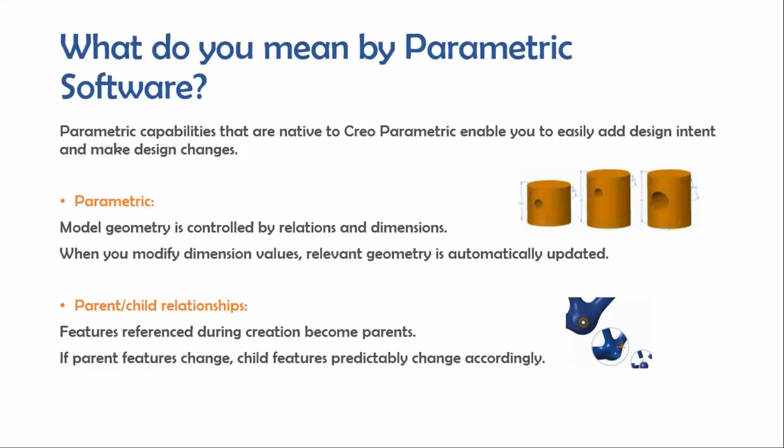With the help of an example using Creo Parametric software, let's see how this parametric tool works. I'm currently in the part modeling environment, where I am going to create a simple sketch. Let me draw the rectangle and make some changes to the dimensions. So here you can see the sketch has dimensions as well as relations.

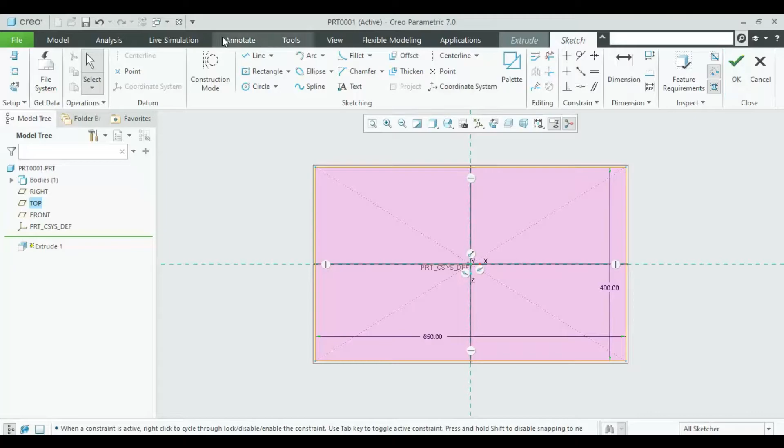Let's change the dimension. Alright, as you can see I have modified the dimension. So let's also create a hole in it. Now you can see there are two dimensions, in the x and y directions, and one dimension which is the hole dimension. So let's change the dimension referenced from the top face, and let's change the diameter of the hole. All right.

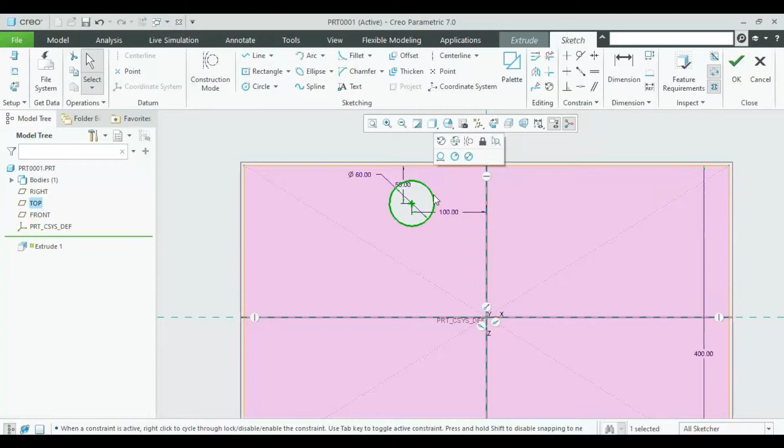Alright, in the next case, let's see if I make a circle along the diagonal. Here you can clearly see that the parametric technology inside the software is taking the reference of the relation and the reference dimensions from the top edge. So there are only two dimensions: one is the diameter, the second is the dimension from the top edge, and it takes the reference of the diagonal, and you can see the coincident relation here.

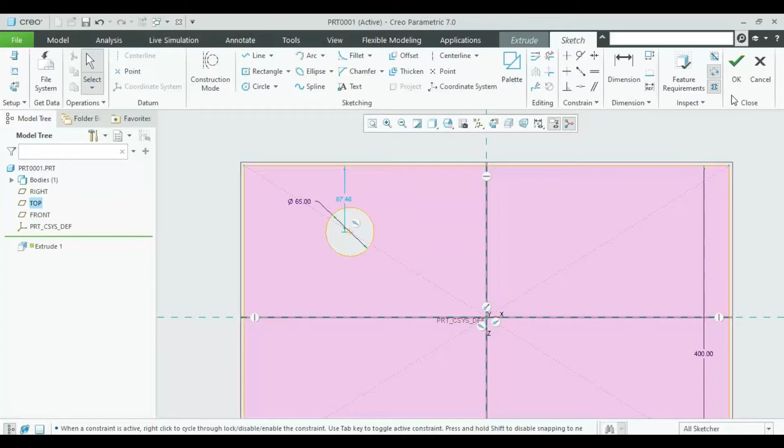All right, let's close this, give some thickness value and click on OK. Here is the first feature, the extrude which I have created. So what will happen if I change the dimension from 400 to, suppose, 300?

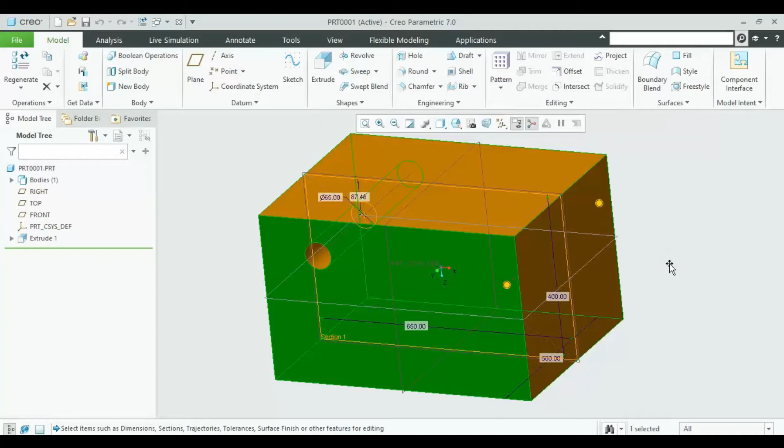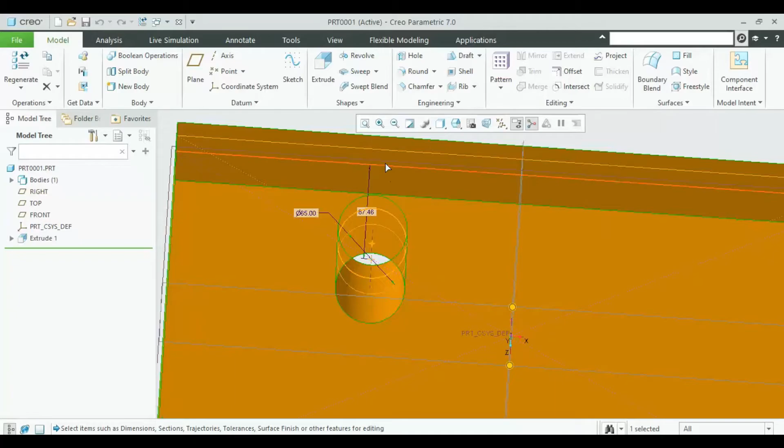You can clearly see that the hole is maintained at the same distance, 87.46 from the top surface edge, and the diameter of the hole also remains the same. Now let's change the diameter of the hole and see what happens to the other dimensions. Here you can see the dimension from the top remains the same and the diameter of the hole changes. Makes sense.

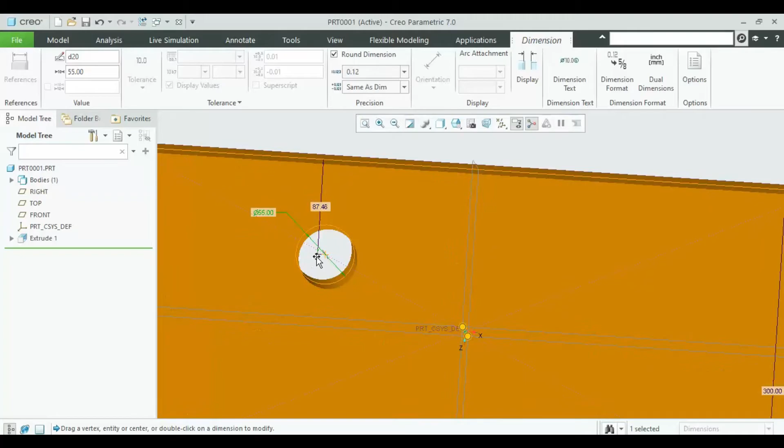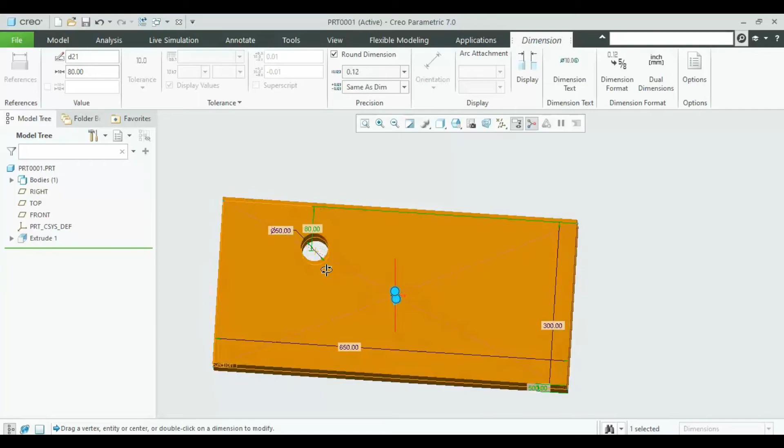Okay, now let's change the height from the top edge. As you can see, since the hole has to maintain the coincident relationship as well as the distance from the top, it is moving along the diagonal, right? Now let's change it to 90 and you can clearly see it is moving down because it has that coincident relationship.

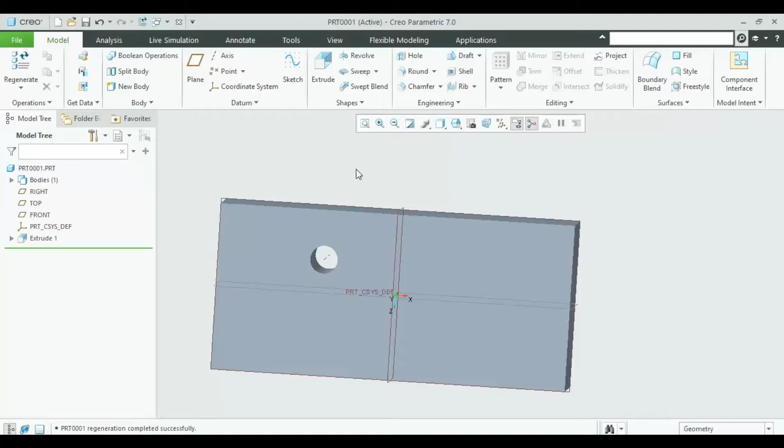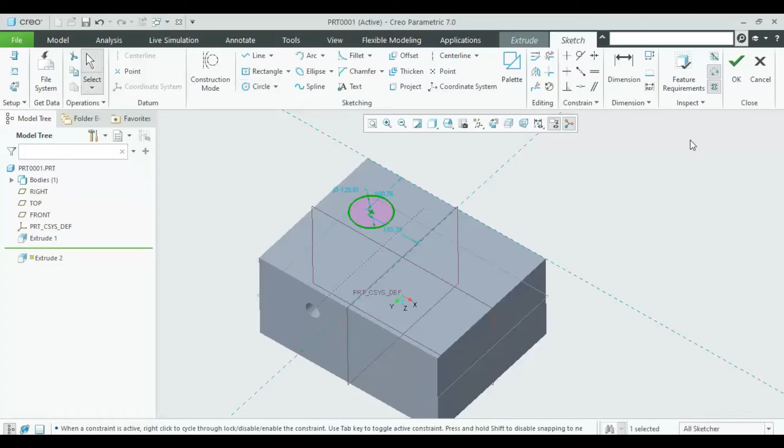Alright, next let us create one more extrude on the top surface. So for that, let me use the extrude command and create a circle. Alright, and I'll click OK. Then let me right click on it.

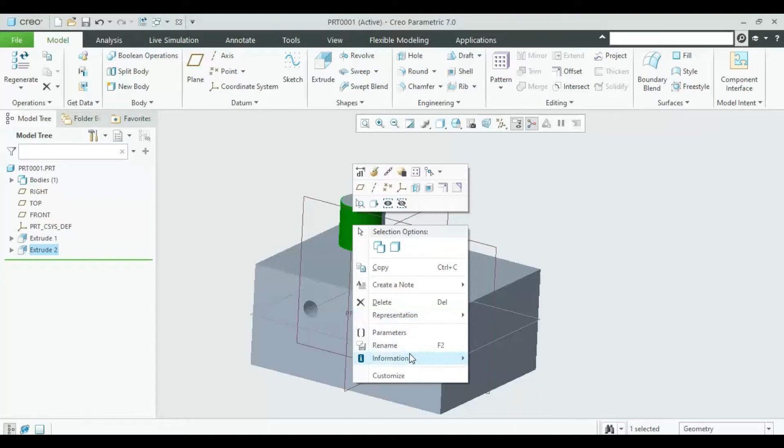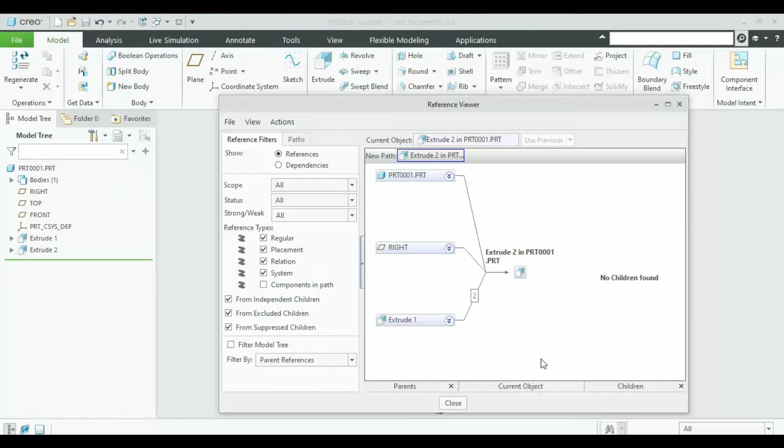If you go to the information tab and then reference viewer, you can see the parent-child relationship. In this example, I would like to explain the parent-child relationship in Creo. The current part which we have selected has an extrude as a parent, which makes sense, and the right plane, because it might have taken some references or dimensions from the right plane, and the part itself.

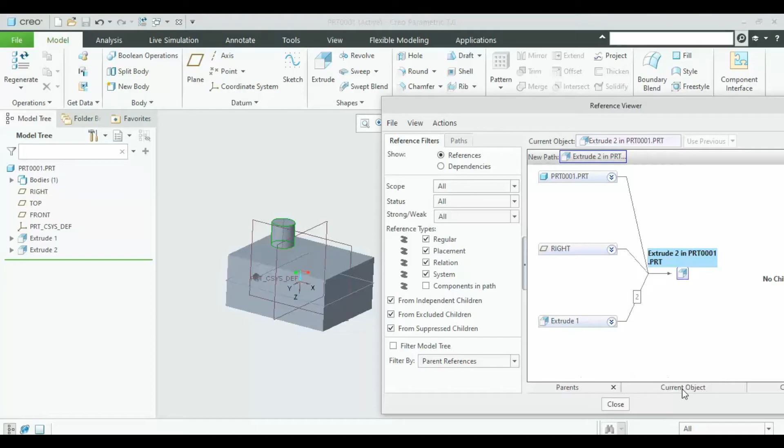Here you can clearly see that it has no children, because in the child part we have not created any other command like extrude or revolve. We have not created anything on the other part. So let's go ahead and make something on this part as well. Let's see what the software tells us after creating a small extrude cut.

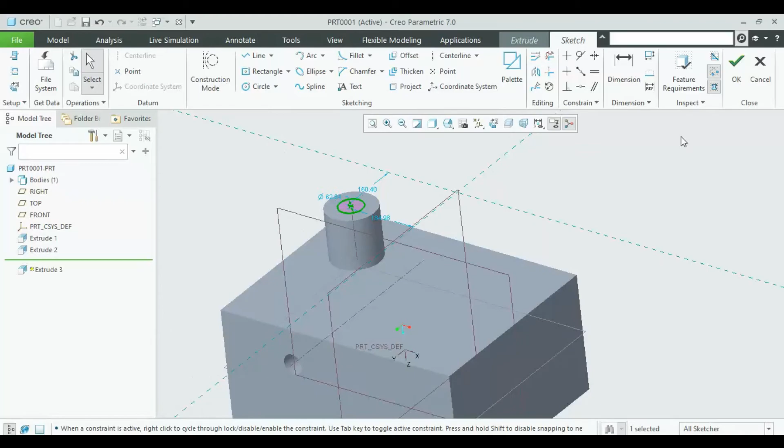This feature comes in handy when you have created a complex geometry and need to modify certain things, and while modifying you need to see which other features will be affected. There are chances that the software will give you an error, so this helps you resolve those errors. So this is all about the parametric feature which I tried to explain.